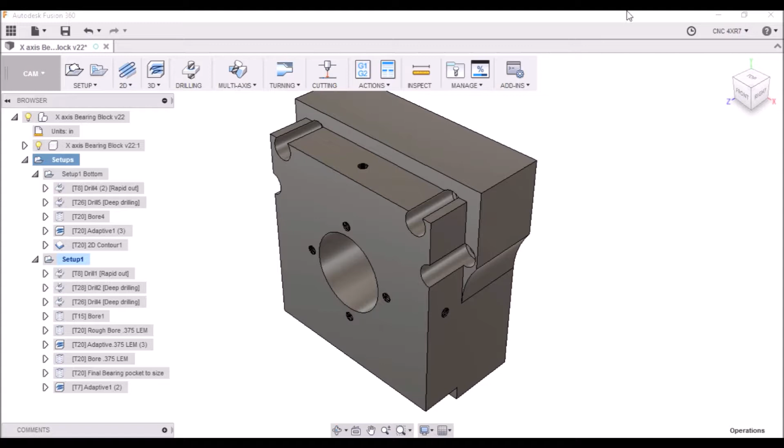Hey guys, well here we are today in Fusion 360 and we're going to go over our X-axis bearing block cam operations. For the front side, we're going to set up our stock with the top left corner as our XYZ origin.

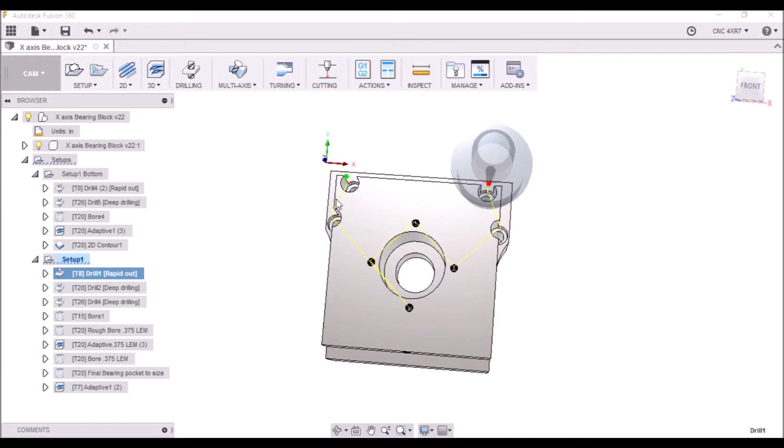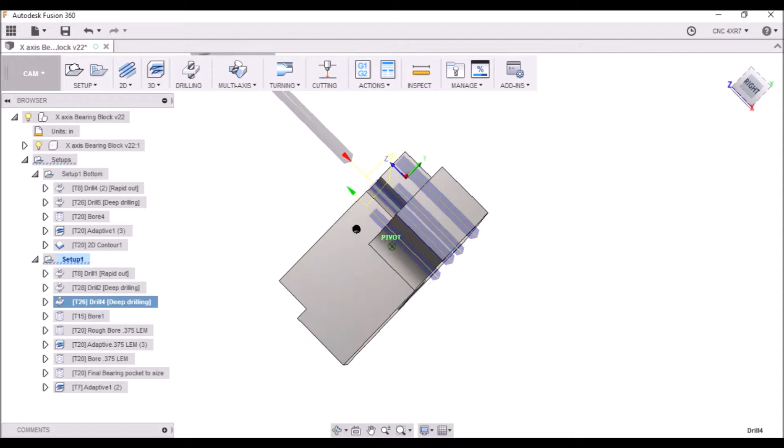And again, pretty much all of these operations we've done before on the Y and Z axis. We're going to center drill all of our hole locations. Going to come back with a 3/32 and we're going to bore our 4 holes for our bearing cover. We're then going to come back with a 1/4 inch drill bit and we're going to be boring our 4 mounting holes. We're going to be going all the way through. This is a 2-inch thick stock.

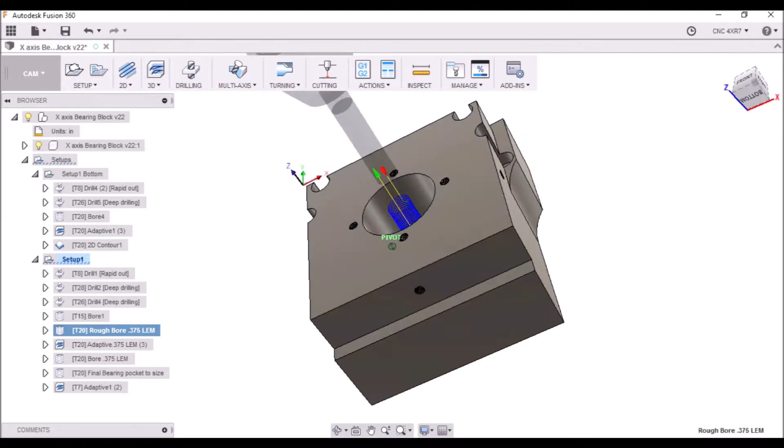Next we're going to come back with a 3/16 inch end mill and we're going to do our counter bore for our socket head screws. And then we're going to work on our bearing pocket. Now this is pretty much the same way I did it with the Z-axis. It worked pretty well, so I thought I would just repeat those cam ops. We're going to go all the way through down to our hole that we did in the back side. This will give us a nice clearance hole and a place for chips and coolant to flush through.

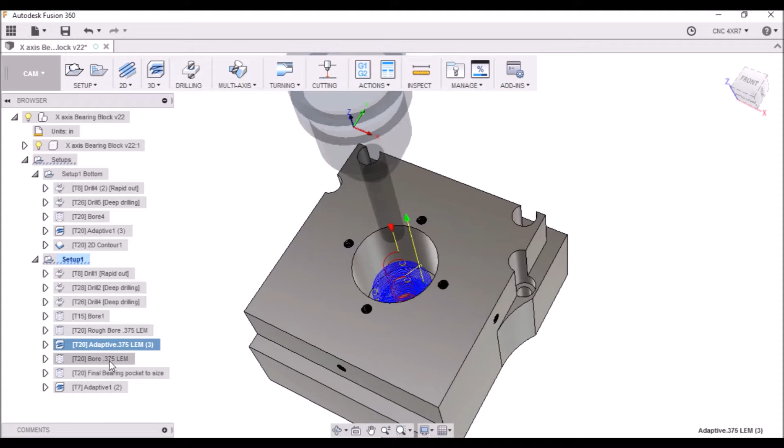We're then going to come back and we're going to start working on our bearing pocket with some adaptive clearing. We're going to do this in 2 steps. The first step being 3/4 inch, and then we'll go back down to the final depth, which is about 1.29. We're then going to come back and just kind of clean this bearing pocket up and leave about 4 thousandths.

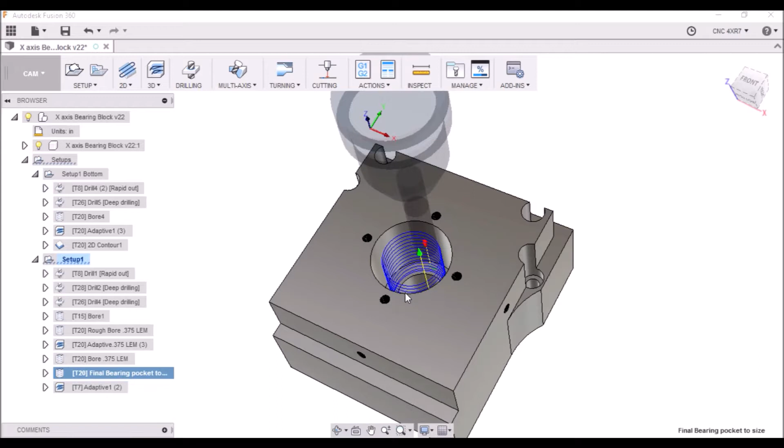And then we're going to do one pass just to make sure that if we have any tool deflection, we get a nice clean pass for our bearing pocket. And you can use this particular operation to either remove a little more stock or leave a little stock, depending on how your bearing's sizing up. And then last, we're going to be doing some adaptive clearing to clear this shoulder for our X spacer.

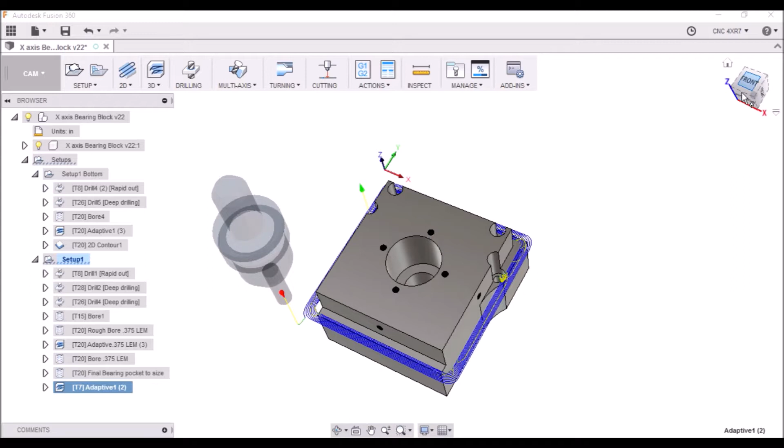And I decided to really try to tweak my feeds and speeds. I had a real long discussion with Wyatt, and he clarified a lot of things that I had some misunderstandings with on my chip per tooth, my width of cut, feed rate, RPM, and how it all is related. That stuff can get kind of confusing. I appreciate all the information that Wyatt gave me.

I'm making 2 of these, so what I decided to do was do a little experiment with my feeds and speeds. So we're using a 3/8 inch 4-flute end mill. This is a carbide end mill, and our depth of cut is going to be 3/4 inch here. The chip per tooth or feed per tooth is 2.5 thousandths. You want to stay around 1 thousandths to 3 thousandths. So I just chose 2.5 thousandths to see where we were at.

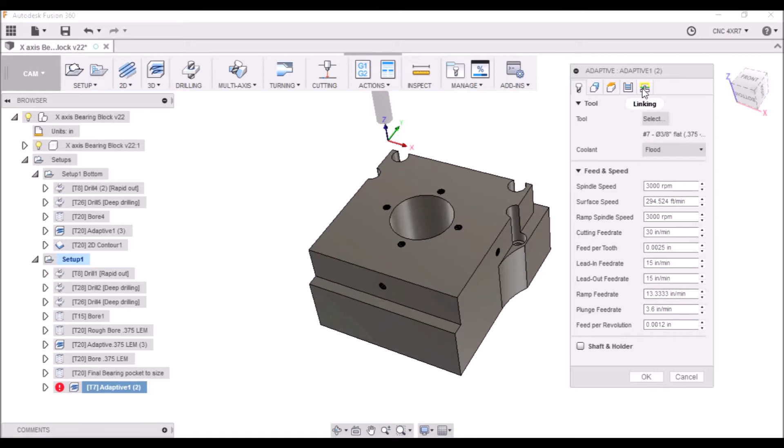The RPMs are going to be 3,000 RPMs at 30 inches per minute. And I left this pretty much the same, and what I did with the 2 different setups is I changed the width of cut: 25 thousandths, and I also ran it the first time at 15 thousandths. I was pretty surprised. I think I could go a little bit more, maybe 30 thousandths or 35 thousandths. It seemed to be working really well.

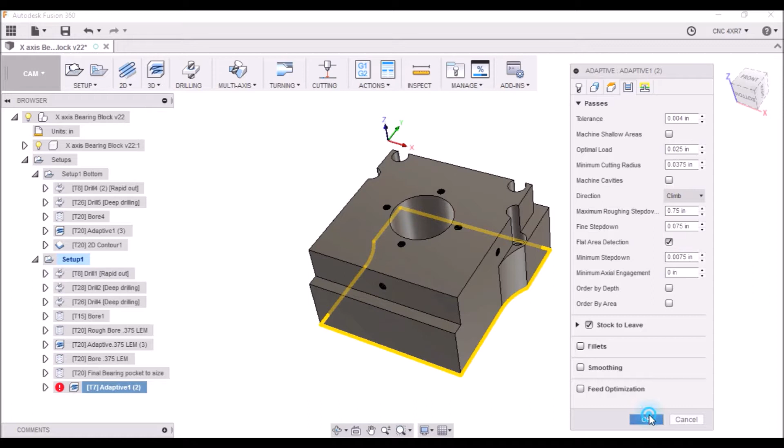So let's go out to the mill and we'll take a look at all these cam operations and we'll run the X-axis bearing block. Hey guys, I'm going to go through these operations rather quickly because I don't want this video to be too long. It's pretty much the same cam operations I did on the Y-axis as well as the Z-axis. So we're going to go through them rather quickly.

Alright, we've got all the mounting holes bored. Now we're going to come back with a 3/16 inch end mill, and we're going to do our counter bore for the socket head screws.

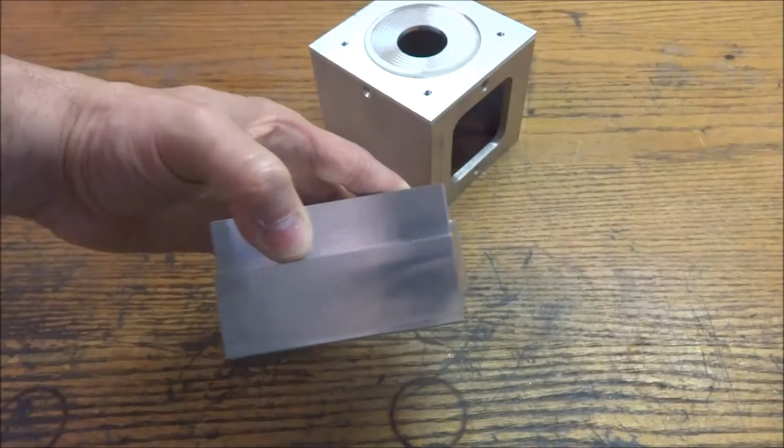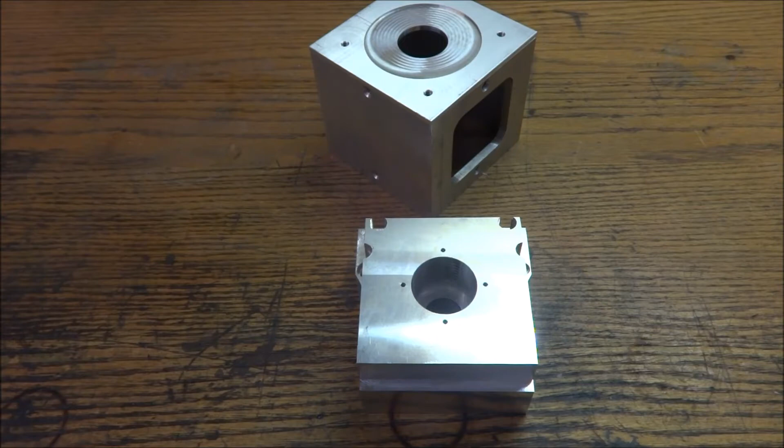Alright, well, finished up the X bearing block. Turned out really well. I played around on this recess here for the spacer. I played around with my chip per tooth, my feed rate, and my width of cut. And there's still a lot of room there for me to increase the width of cut, I think.

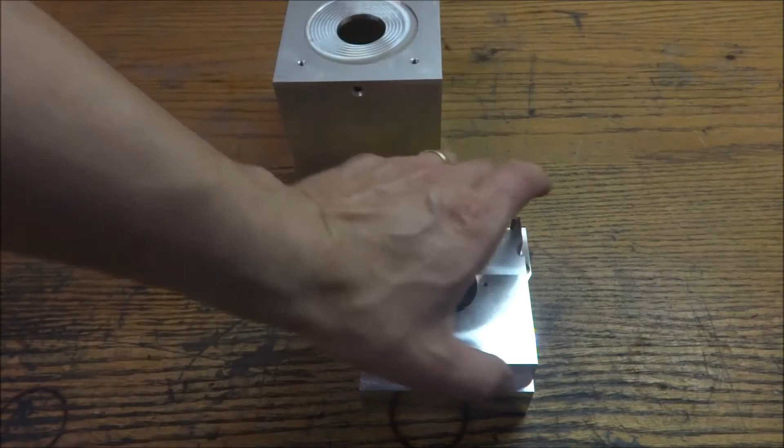The first pass I ran at 0.015 width of cut, and the second one I ran at 0.025 width of cut. And I really think we could go up to 30 thousandths and even 35 thousandths. It seemed to cut really well, so the finish is fairly nice. This is not a finishing pass, this was just one pass.

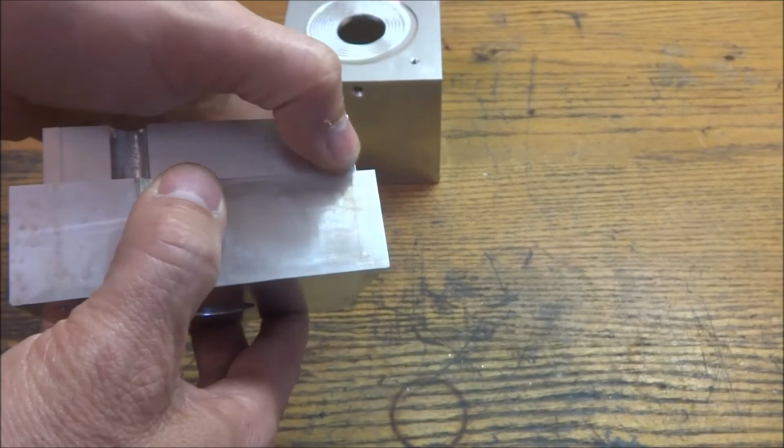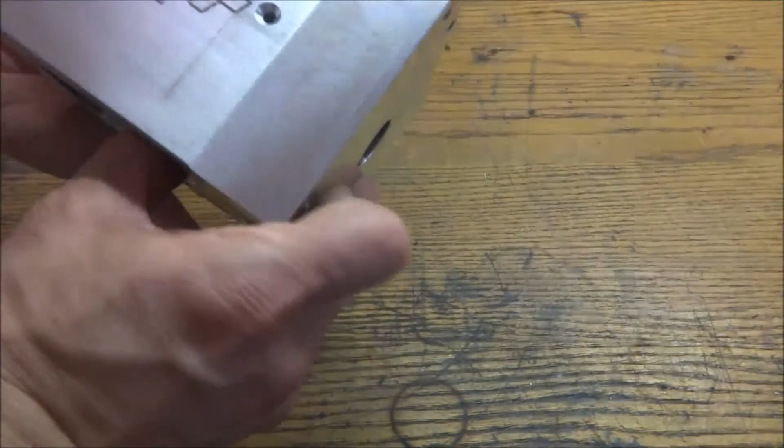It did leave a little mark right here, so I could probably come back and just do a contour or a profile and do a finishing pass on that. But I think overall, it turned out really well. It drops right down on there when you get it lined up. So I think overall, pretty happy.

I still have a lot to learn as far as the chip per tooth, the chip load, the width of cut, the feed rate, the RPMs, and that'll all just kind of work its way out as I get more experience running this mill. And then I think it'll change some once we get the belt drive going.

But I'm going to come back and do some small stuff, bore out and tap out these holes here, and we're going to probably do a video on the bearing cover. I've got to make some of those, and a couple more pieces I need to make, and then we'll wrap this whole mount video series up.